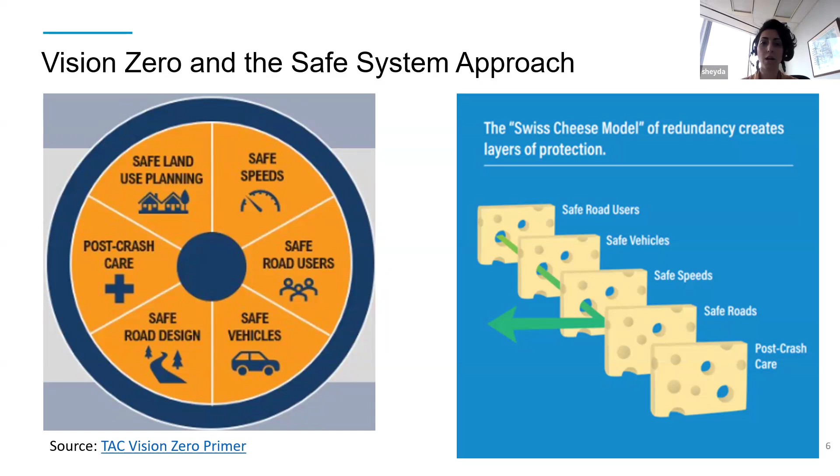A few slides on the problem with speed in the first place, and they all point to the laws of physics and the biology of the human body. First point being that as humans, when we are driving, our field of vision is very different depending on how fast our vehicle is moving. The visual in front of you is trying to show our peripheral view, what we can see and process on the sides of our central focus when we're driving at 25 kilometers per hour, and compares that to what that looks like at 50 kilometers per hour. And it is a drastic reduction in what we are able to see and identify and make decisions on.

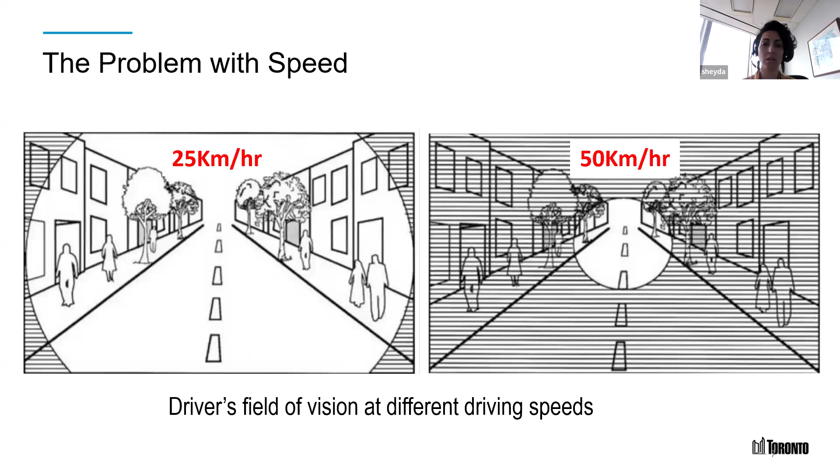If I could quickly go on a tangent, I'm sure a lot of us have heard about challenges with larger vehicles, SUVs and pickup trucks. One of the reasons why those types of vehicles are more dangerous in an urban environment relates back to this concept of the peripheral view, because the driver is more elevated and farther away from the surface of the road. Again, that sense of speed diminishes a lot in larger vehicles because you are not as close to the building faces and the surface of the road that is moving relatively quickly relative to your body, and that means that we're more likely to speed.

The other piece around speeding is the time that it takes to bring a vehicle to a stop when we eventually do notice that there is a danger that we need to stop for. The faster we were going, the longer, based on the laws of physics, it takes to bring that vehicle to a stop. And then coupled with that is the law of transfer of energy, that there's an exponential relationship between the speed at which two objects collide and the amount of damage that is caused to those objects. I'm sure there are many different versions of this visual that you may have seen.

This one is from the City of Toronto Complete Streets Guide that shows you that, if a driver hits a pedestrian at 50 kilometers per hour, there's an 85% likelihood that that person will not survive. And if you reduce that speed by just 10 kilometers per hour to 40 kilometers per hour, that likelihood improves significantly. And again, pointing at that exponential relationship there. So we know that a small reduction in speed makes a significant reduction in the probability of fatality or serious injury.

And then the visual at the bottom, this is the stats for Toronto, but it's not different for any other North American jurisdiction. We know that the majority of our fatalities and serious injuries are happening on our arterial roadways, even though they don't make up as many kilometers of a road network. And that's one because a lot of the volume is on those roads, but also because a lot of the higher speeds happen on those roads.

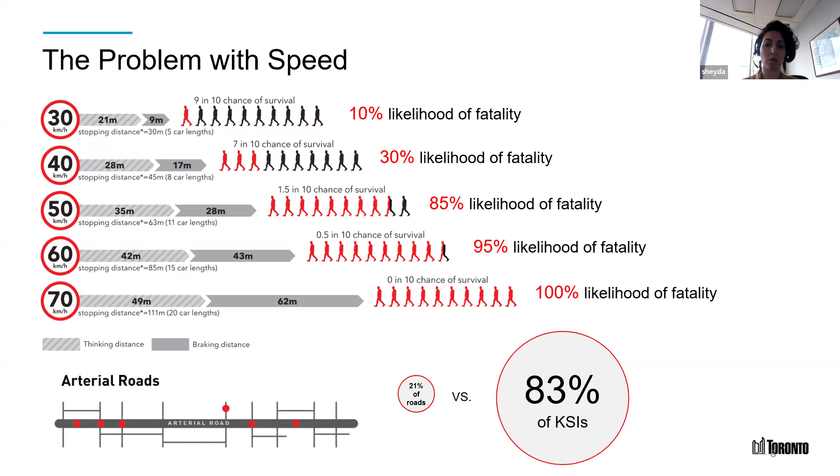Another compelling way of looking at it, again, this is City of Toronto numbers, but would be pretty similar for other jurisdictions. Looking at the total kilometers of road in each of our road classifications, local roads make up the majority of them. And interestingly, that's also where we hear a lot of the complaints from local residents and our elected officials when it comes to safety. But then when you look at where fatalities are happening, the majority of them are happening on our arterial road network. Again, higher volumes, higher number of traffic lanes, and higher speeds.

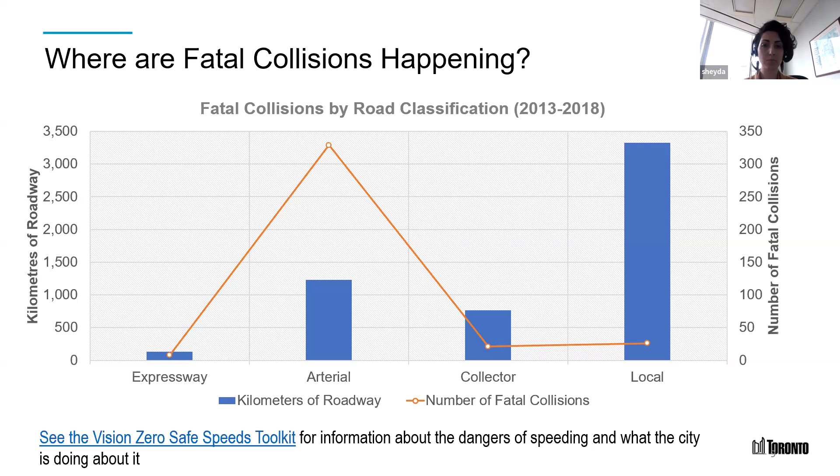So the next several slides are where I'm going to jump into the many different programs and initiatives that we have, and where the information is available. I'm going to talk about the measures of effectiveness of these that we have looked at.

In 2019, we started looking at the network of our arterial roads where speed limits were more than 50 kilometers per hour and investigated whether there's any good reason why they should remain at higher than 50 kilometers per hour and reduce those. So that was about 250 kilometers of roadways that we investigated and reduced the speed limit of to 50 kilometers per hour.

Similarly, in the following year, we looked at the collector road network and where it made sense to reduce existing 50-kilometer per hour collector roads to 40 kilometers per hour. So we reduced about 60% of our collector roads that way. So those together are about 500 kilometers of speed limit reductions that we did in the early days of our Vision Zero 2.0 program.

Then a couple of years later, we used vehicle probe data from HERE Technologies that some people might be familiar with to look at if speed limit reductions alone have shown reductions in speeding. And we certainly saw some reductions there, some consistency. The nature of the data is in such a way that we wouldn't be able to say there was an X% reduction in speeding. But the reductions in the number of segments of road where we saw reductions were consistent.

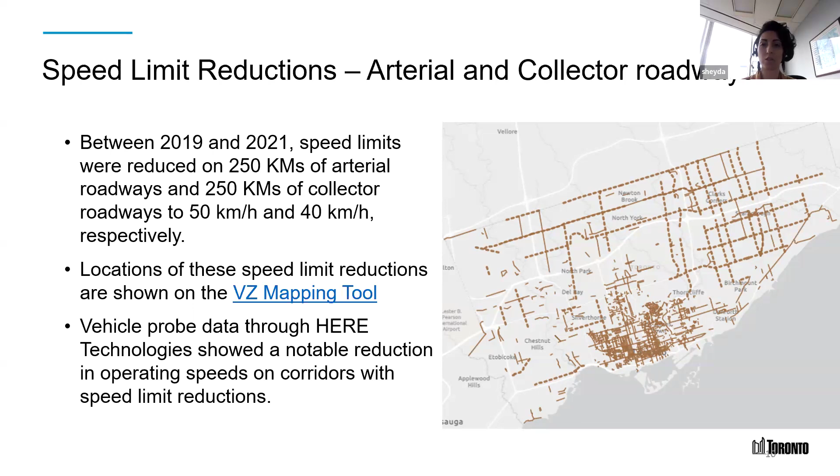Moving on from our collector and arterial road network, we have now moved on to our local road network, where council unanimously approved the approach of reducing all local roads to 30 kilometers per hour. Again, knowing that relationship between speed and the likelihood of survival. So it's a program that we launched a couple of years ago, and it's a major endeavor in that we have thousands of kilometers of local roads in the city of Toronto.

We are using an area-based approach in reducing those, similar to Ottawa or Mississauga that others may have seen, where we put these 30 kilometer per hour area begins and ends signs at the beginning and end of sort of boundaries of a neighborhood.

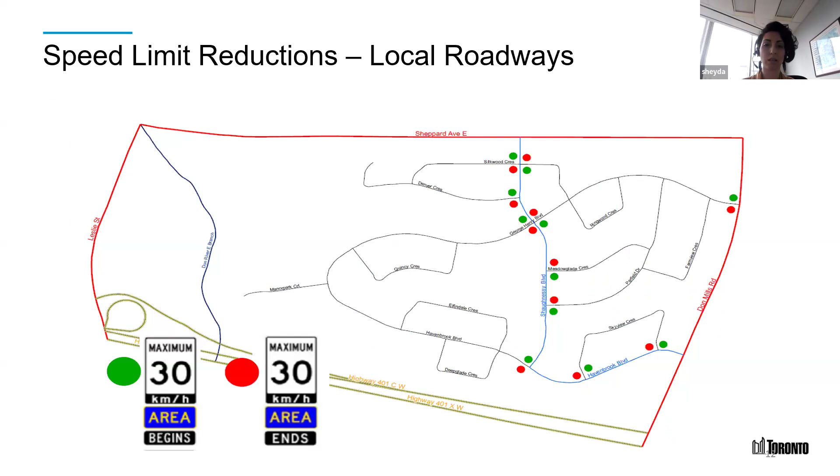Back in 2015, the central part of Toronto saw all of the speeds on the local roads reduced to 30 kilometers per hour, and the Hospital for Sick Children at the time did a pretty rigorous study looking at the effect of that, and they found a 28% reduction in pedestrian motor vehicle collisions and a 67% reduction in serious injury and fatal collisions on those roadways compared to roadways that remained at 40 kilometers per hour elsewhere in the city. So we know that those reductions have made a difference. Just a quick visual showing those begin and end signs as you enter the local road network.

I started with speed limit reductions, probably because you could argue they're the lowest hanging fruit, but we also know that they on their own won't get us to the speeds that we want to, simply reducing the speed limits. We know that ultimately designing self-enforcing roads that discourage speeding is the right approach. So one of the programs that we have in the city of Toronto is our traffic calming program, where we install speed humps, speed cushions, and speed bumps, which are limited to laneways only.

And one thing that we did in 2023 is update our traffic calming policy, knowing that we wanted to be able to expand the traffic calming toolkit to the majority of the streets in our local road network. Now that council has unanimously approved the idea of reducing all the local roads to 30 kilometers per hour, we know that these roads were not built for 30 kilometers per hour, and so we know that there's a big mismatch between how we want them to operate and how we built them several decades ago. So we know we need to do these interventions in the form of traffic calming.

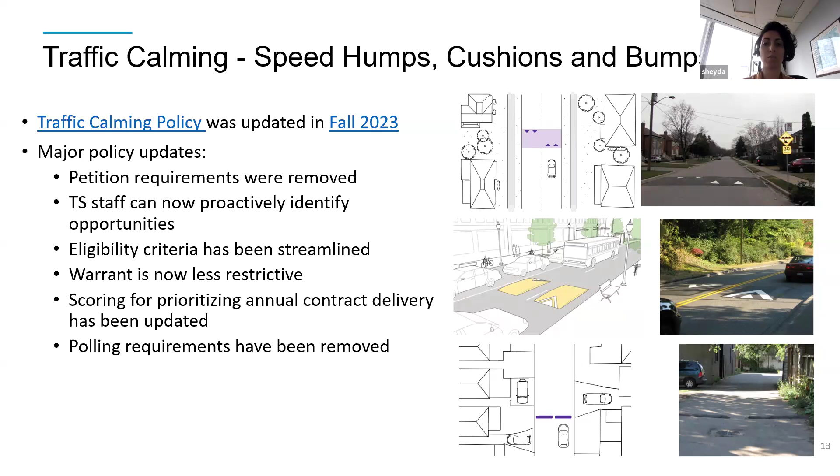The other thing I'll point out is a new-ish tool that we added to the traffic calming program, which is speed cushions. We're always looking for tools to address speeding on higher order roads. And that's because a lot of times vertical deflection gets in the way of the types of use that you have for higher order roads, like emergency response and transit operations.

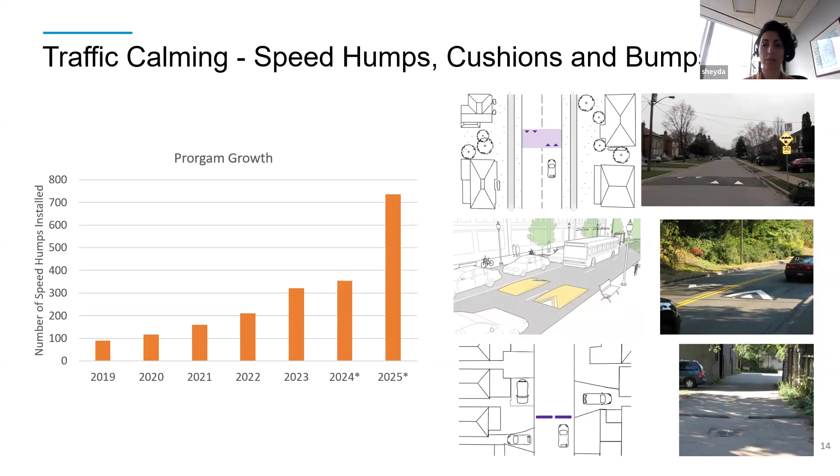We found after piloting speed cushions and running them with bus operations that they do serve both needs, and that buses are able to bypass them without being impacted. So the passenger experience is not impacted, but passenger vehicles still, at least one of their wheels will have to go over the hump, and they do have that traffic calming effect. So that's a relatively new tool that we have introduced that opens it up for a lot of our collector roadways with transit service on them.

Another tool that we launched a few years ago is in-road flexible speed signs. Again, nothing too new. We've seen many other Canadian and North American jurisdictions launching these. To date, we have about 360 of these across the city, and every year we reach out to local councillors, tell them which area in their ward we have identified through a proactive method where we would like to target for speed reductions, and also give an opportunity for the councillors to identify locations where they want us to look at.

I call this a 70-30 split. A lot of the programs that we are launching, we were trying to make sure that 70% of that capacity is reserved for data-driven location identification, where the data is telling us interventions are needed, but still reserving about 30% of the capacity for the community and councillors to bring their locations of concern to us, and for us to look at whether an implementation makes sense.

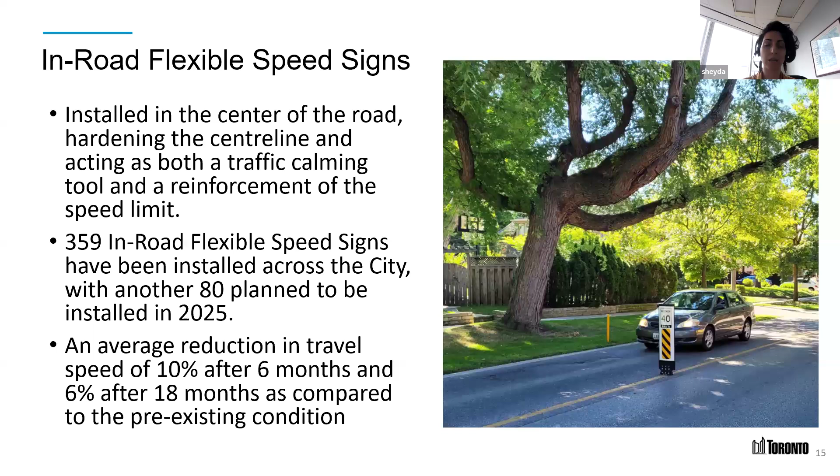So when we piloted this a few years ago, we found an average reduction in travel speeds of about 10% after 6 months. It diminished a little bit after 18 months to around 6%, but it's still a significant enough reduction. The only other thing I'll say about this, because I know many other jurisdictions have looked at it as well, is whether they remain during the winter months. And based on the math that we did and the damage rate and the cost of removing and replacing them after winter, we have opted to keep them in place during the winter months. And we work with our snow colleagues to make sure they're damaged as little as possible.

We have a mobile watch your speed program, which I'm sure many are familiar with. Digital display signs that pick up the speed of the vehicle that is approaching and flash when that speed is over the speed limit. We launched it as a pilot several years ago, and we saw a 34% reduction in average speeds and 18% reduction in excessive speeding at those locations.

So we turned it into a full-time program where each ward of the city gets 7 of these signs that rotate to various locations based on the requests from the public, but also based on a data-driven approach where we identify speeding is more problematic and needs an intervention. This is a countermeasure that over time the effect of it diminishes, so the rotating nature makes sense to sort of renew its speed reduction effect.

In terms of the overall sort of modifying the geometry of the road and building self-enforcing roads, I'm sure many are familiar with the City of Toronto lane width guidelines. We are in the midst of updating that right now for the first time since we launched it, and the update is very much aligned with what's in the lane width guidelines right now.

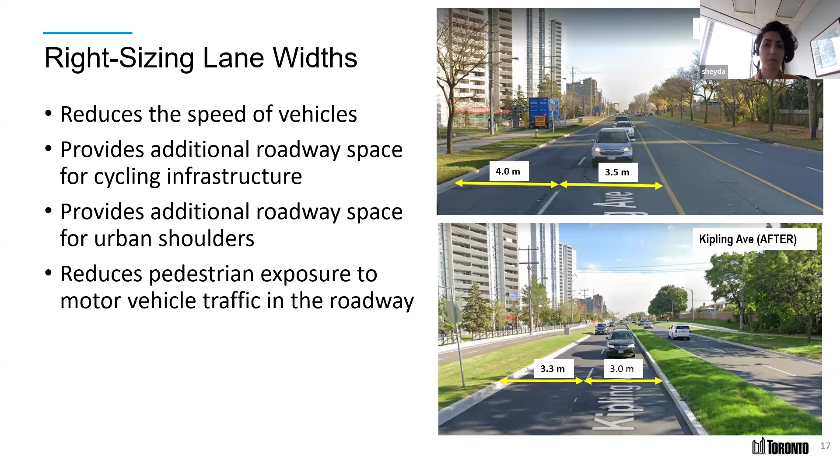So coupled with that, the ability to reallocate excess space on the road is the very many cycling infrastructure that we have added to city streets over the last several years. Here's an example of one on Bloor Street West, the Bloor Street West Complete Street, where after the implementation we saw a 17% reduction in vehicle speeds in both directions.

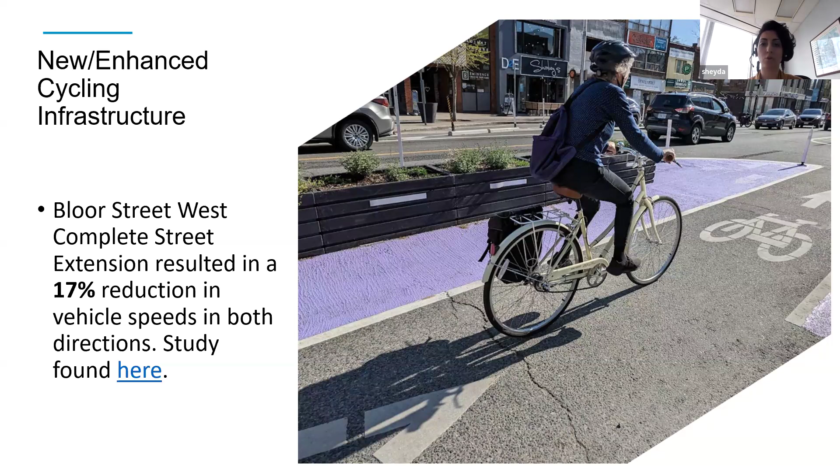And it's both in terms of the added visual friction and sort of bringing in those walls in the field of view of a driver that reminds them of how fast they might be traveling, but also just reallocating the excess roadway space to where it's most needed.

There are also measures that we do at intersections that we may not often think about as speed mitigation strategies, because they're not mid-block and they're not trying to address those high speeds in between controls. But they very much are still about addressing speeding, in this case, in the case of the left turn calming program, addressing speed of left turning vehicles. So again, a program that I'm sure is familiar to many, but it basically hardens the center line, encourages left turning vehicles to make their left at a slower speed and at a sharper angle that makes pedestrians more visible.

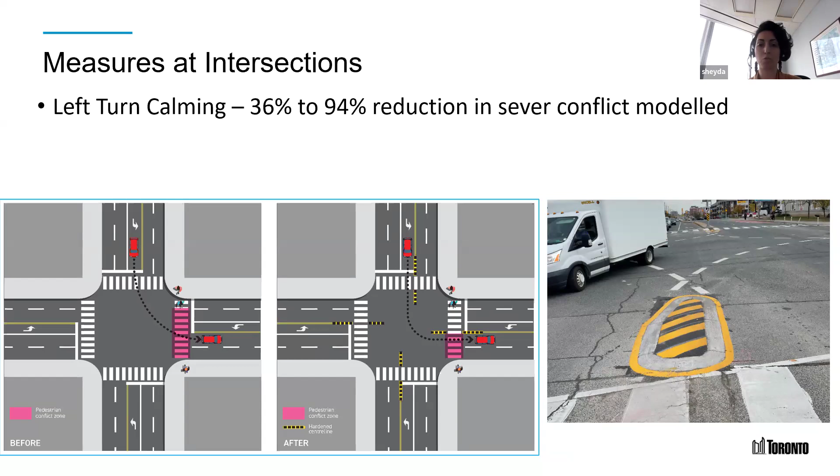And studies we've done with CIMA together with the University of Toronto have modeled the reduction in severe conflicts to where it looks like a 36% to 94% reduction in those modeled conflicts. So that's a program we have expanded. Every time we build a new traffic control signal where the opportunity is there, we add these left turn calming features. And in those instances, it looks more like the picture on the right, where it's a permanent feature made out of concrete and asphalt. But we also sometimes use rubber humps when we want to put this intervention in pretty quickly.

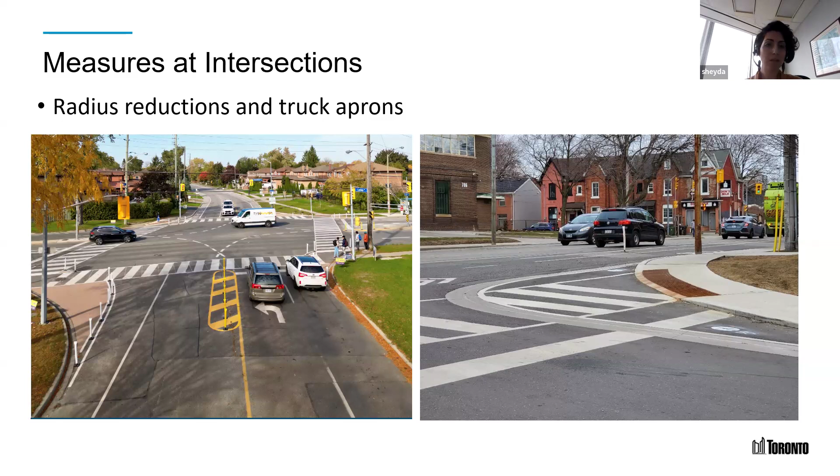Raised crossings are another feature where the main purpose is to elevate the pedestrian, make them more visible, but they also have a speed management effect in that the vertical deflection certainly slows down the speed of any vehicle that's going through the intersection or making a turn onto that leg. So I wanted to make sure I highlight that. And similarly, curb extensions again have the same effect.

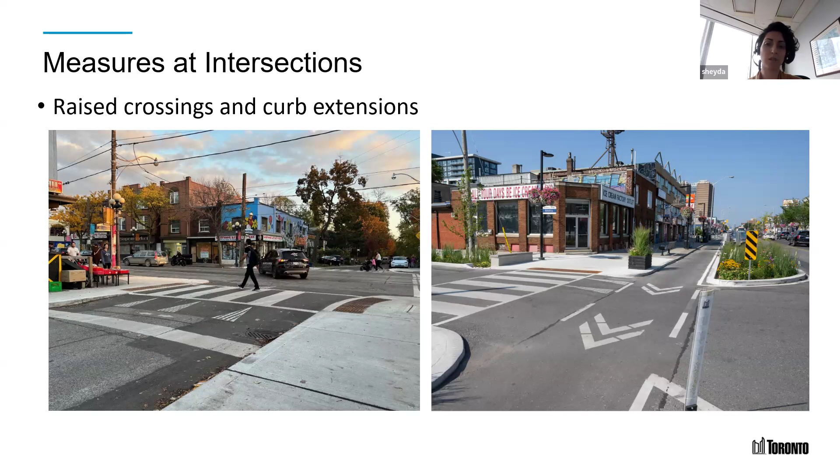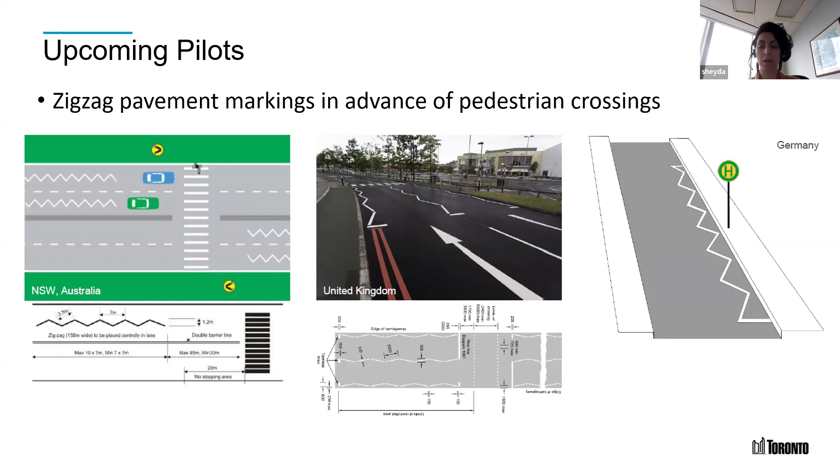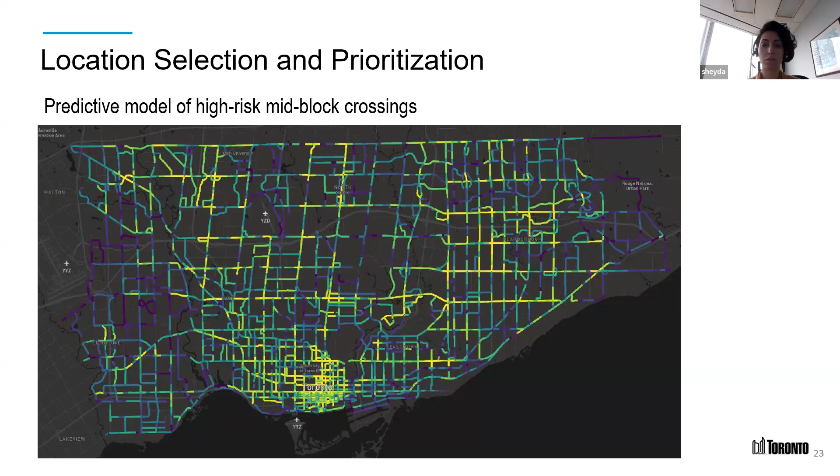It's a predictive model that looks at high risk mid-block crossings. So it tries to not only look at historical collisions within each mid-block segment, but use those collisions to develop a predictive model that tells you, relative to other segments of the road, what is the relative likelihood, relative risk of a road segment for this type of collision, mid-block collision, which then helps us significantly with deciding where to roll out the many different countermeasures that I went through already.